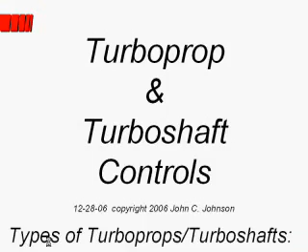This is a section on turboprop and turboshaft controls. There are basically two types of turboprop and turboshaft engines: they're either fixed shaft turbines or they are a free turbine.

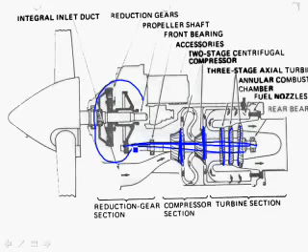First, we'll take a look at a fixed shaft turbine. This is a cutaway of a TPE 331, and we have a cutaway in the classroom. It's got a tire bolted onto it instead of a propeller, and it's got a main shaft running through the engine. It drives 2 stages of compressors, drives 3 stages of turbines, and this shaft goes into the propeller reduction gearbox, and there it goes slower. In this case, the engine spins at 40,000 RPM, and the propeller spins at 2,000 RPM, and of course, that's why we have the gear reduction.

And it's always connected. If you come up to this propeller and start spinning it, the engine will spin. And if you go over to our cutaway, you'll find when you spin the tire, the engine spins. That's why it's called a fixed shaft engine, because the turbine is always fixed or attached to the output shaft, whether it's a propeller or an output shaft for a transmission on a helicopter. It doesn't make any difference.

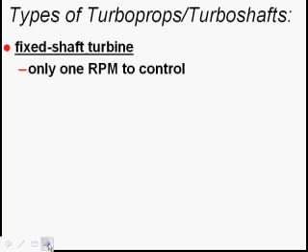One nice advantage of that kind of an engine is that you only have 1 RPM to control, so you only have 1 RPM gauge. You only have to make sure that one rotating component has a controlled RPM. If you looked at this turboprop, in fact, our stick diagrams that we've been drawing of turboprops are of the fixed shaft type. The shaft comes out, we've got a gear reduction box, and then there's a propeller, and if we spun the propeller, the engine would rotate.

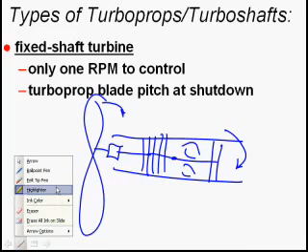And since the engine and the propeller spin together, if we put an accessory gearbox on this engine and then had a starter motor, not only is it going to have to spin the engine, but it's going to have to spin the propeller. So that propeller is going to be held in low pitch when the engine shuts down, so that when the starter has to spin the engine, the propeller doesn't have too much drag. So it's got blade latches in there that grab the blades when the propeller shuts down, just like in a Seminole, so that the blades are held in low pitch when the engine shuts down.

A free turbine, on the other hand, if you were going to draw a stick diagram of a free turbine, there's more than one way to do it. Let's see, here's one way to do it. Whoops, it's a pretty lousy propeller. You could run it like that. You could have a 2-spool engine that looked like this.

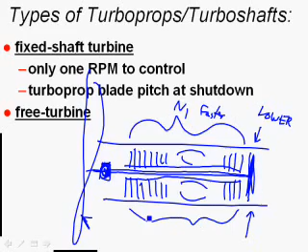And this one turbine drives the output shaft and the gearbox going to the propeller, it gets a spin at a lower RPM typically, although you're still going to have a propeller reduction gearbox. And the rest of the engine here, that's going to be N1. This RPM they're probably going to call the propeller, although you could call it N2. This is probably going to spin faster. And this turbine that is spinning the propeller is free from the rest of the engine, hence the term free turbine.

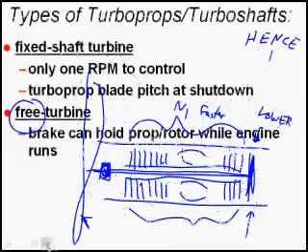And on this type of an engine, I'll get back to this in a second. Well, what the heck, we'll take a peek. Here's a Pratt & Whitney PT6, a very popular turboprop engine. Air comes through a duct on the bottom of the engine and enters the engine. Let's see, there's 1, 2, 3 - looks like 3 or 4 different stages of axial compression, and then, hard to see in this diagram, it has 1 stage of centrifugal compression.

It flings the air outward. It has a reverse annular combustion chamber, so we accelerate the gases aft. It makes another turn, and here's the turbine wheel right here, and this turbine wheel drives the compressor. So here is the gas producer, or NG, and then there's a second turbine.

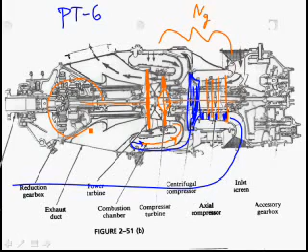The second turbine goes into the reduction gearbox, and that output shaft spins the propeller. So essentially, and then of course the exhaust gases come out and go backwards. So the PT6 is a free turbine in that the turbine that drives the propeller is free to spin separately from the rest of the engine, or you could say separately from the gas producer.

Now the nice thing about a free turbine is you can have a prop brake or a rotor brake, and you can run the gas producer part of the engine, and of course the accessory section is hooked up to it, so you can run the electrical generator off of the accessory section. Since the engine is spinning and it's got compressors, you can take bleed air off of it and run the air conditioner.

So if you've got a big turboprop and you don't have an APU, or a big helicopter and you don't have an APU, you can get bleed air for air conditioning on the ground, and you can spin the generator on the ground if you have some kind of a brake. That way you don't have to worry about a propeller or rotor blade spinning and chopping people up, yet you can have electricity and bleed air to run your pneumatics and air conditioning.

The other nice thing about a free turbine versus a fixed turbine is that you can get away with a smaller starter, because you don't have to spin the propeller when you start it up.

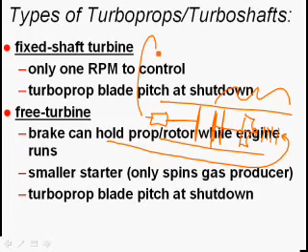Therefore, if you have a free turbine - we'll just say it's a PT6 because that's pretty common - here's our free turbine, and there's a couple more turbines, and the air is going to come underneath the engine and go in the intake. This propeller, since the gas producer is the only part that has to get spun by the starter motor, actually goes to really, really high pitch. In fact, it actually goes to feather.

The blades actually go to really, really high pitch because we don't have blade latches grabbing the blades at engine shutdown, so the blades go to feather. On a PT6 you can see the exhaust duct coming out of the side of the engine. If it's a free turbine turboprop, the blade pitch at shutdown is going to be feather because they're not going to waste their time and money on blade latches to hold the blades in place.

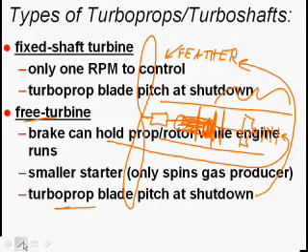The reason why it's better for helicopters to have a free turbine is the same reason why you can allow turboprop blades to go to feather. If we have this output shaft going to - I'll draw it like this - let's say we had a fixed turbine, and it goes to the main rotor transmission.

When we run the starter motor off of the accessory section, that starter is going to have to supply power to the main shaft, the main shaft to the reduction gearbox, the reduction gearbox into the transmission, and the transmission into the rotor blades. So the starter would actually have to turn the rotor blades, which has a ton of inertia, so we'd have to have a huge, giant starter, and it would take up too much weight.

So by having a free turbine, you would only have to spin up the gas producer. Then if you had a turbine inside of a shaft driving the output, the reduction gearbox and the output shaft wouldn't have to get spun by the starter. So for helicopters, you almost always see free turbines.

If you didn't have a free turbine, if you had a fixed shaft engine, you'd have to put some type of clutch mechanism so the engine could spool up and spin up. Like on a piston engine, you got to have a clutch in there so the engine can get started, and then you engage the clutch and the rotor starts to spin, but only after the engine gets started.

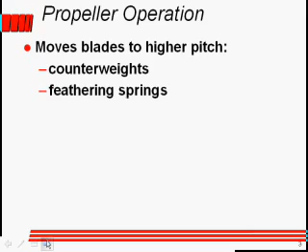Okay, first we're going to talk about turboprops, then we'll talk a little bit about helicopter control. Propellers on turboprops are very, very similar to those found on the Seminole, in that you can have low pitch, high pitch, and the blades go to feather, and the way it works is very similar.

I'll get back to those numbers here shortly. Let's just say you got to understand that in the middle of the blade, this is where it can rotate - it's going to have to rotate around the center of the blade because it's connected to the propeller hub.

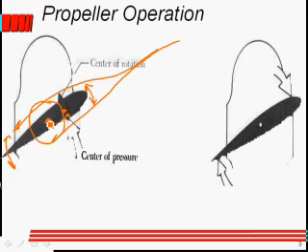Now, according to typical aerodynamics of asymmetrical airfoils, the center of pressure is in front of the actual center of where the blade's going to rotate. So as we develop lift, it's actually going to push the blades to higher pitch. That's called aerodynamic twisting force.

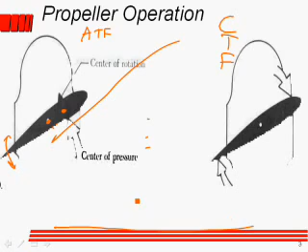The second one I want to look at is centrifugal twisting force. Let's say you're down here on the ground and somebody has a string with a rock on it, and they start spinning this string all around and around. What's going to end up happening is as it's spinning...

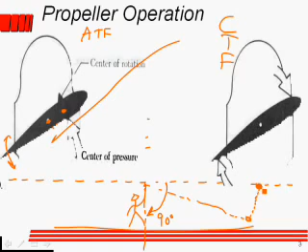This rock is going to come up against the force of gravity and it's going to try to get into the plane of rotation, which is 90 degrees to the ground. It won't make it all the way up because gravity still has to be overcome, but it's going to get really, really close.

Centrifugal twisting force essentially tries to bring all of the mass of the rotating blade into the plane of rotation. If this is the shaft and here's our rotor or crankshaft, here's our plane of rotation with a 90-degree angle, and we're going to try to bring it into that 90-degree angle. So centrifugal twisting force pulls the leading edge into the plane of rotation, and pulls the weight of the trailing edge into the plane of rotation, and that tries to make it go to a lower pitch.

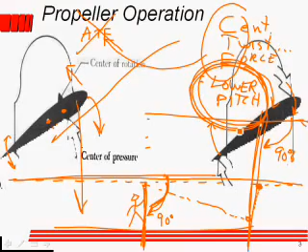Interestingly enough, centrifugal twisting force acting on the blade is always greater than aerodynamic twisting force. So if you had nothing on the blades, and the blades could change pitch at will as you spun it up and it started creating lift—which is blowing the air aft, which we call thrust—the blades are going to go to a lower and lower pitch, because centrifugal twisting force acting on the blades is much, much greater than aerodynamic twisting force.

Now, that centrifugal twisting force works out really well. But let's say we were in a single-engine or multi-engine airplane. We'll stay with multi-engine airplanes, because all turboprop blades act like multi-engine blades. In a multi-engine airplane, here is our airfoil, here's our propeller, and coming off it at a 90-degree angle is a big ol' honkin' counterweight.

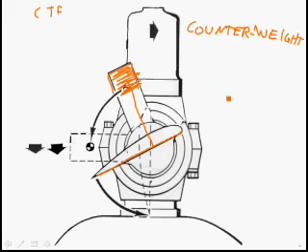Now, if we stop worrying about aerodynamic twisting force and just look at centrifugal twisting force on the blades versus centrifugal twisting force on the counterweights—the counterweights are a long way away from the point of rotation. So centrifugal twisting force acts on this weight, and since here's the plane of rotation, it tends to pull the counterweights into the plane of rotation and make the blades go to a higher pitch.

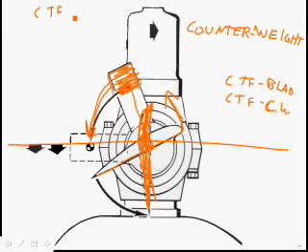So on twin-engine airplanes, this works out really good, because if everything else quits while the engine is rotating—like you run out of oil so the governor can't pump oil to the propeller—then the centrifugal twisting force acting on the counterweights will pull the blade over, bring it to a high pitch, and actually bring it all the way to feather, which is almost pointed perfectly straight into the wind. So centrifugal twisting force acting on the counterweights takes the blades towards higher pitch.

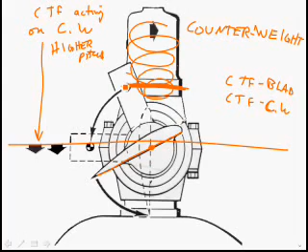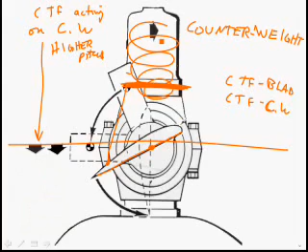Now, also, in these types of propellers are feathering springs. There's a couple of big giant springs in here, and they're pushing down on a piston. This piston is connected to the blades—well, it ought to be connected to the other side of the blade. As this piston gets pushed down, the blades go to a higher pitch. So the second force that's pushing the blades to a higher pitch is the feathering springs.

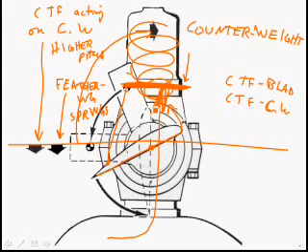And then if we want to take the blades towards low pitch, we're going to have to pump oil from the governor on this side of this piston. And of course, force equals area times pressure, and it's going to push the piston in the opposite direction.

That'll pull the tail of the blade up, and the nose will go down, and we'll go to lower pitch. So governor boosted oil pressure uses engine oil from the engine. It kicks the pressure up to 200 to 300 psi, and that will cause enough force to push that piston up against the feathering springs. It'll exceed the centrifugal twisting force on the counterweights, and this piston will go up, and the blades will go to lower pitch.

On all multi-engine and turboprop blades, you've got to understand that when somebody first made a turboprop blade, they were making it for a twin engine turboprop, so they wanted to be able to feather it. If you lost engine oil, the governor couldn't send oil to the propeller, so the counterweights and the feathering springs would take over and feather the propeller. On a single engine turboprop, they just use the same propeller as they already had, since they don't have to re-engineer it, and it costs less because they're already making those kinds of propellers. They don't have to redesign it and build it any differently.

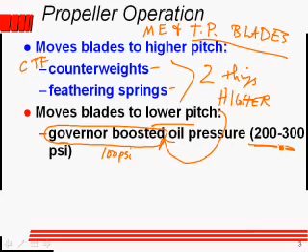The engine oil pressure is probably around 100 psi, but that doesn't have enough force to push on that actuator, on that piston. So the governor actually has its own oil pump and kicks the oil pressure up to 200 to 300 psi, so it'll have enough strength to actually push the blades where they need to go.

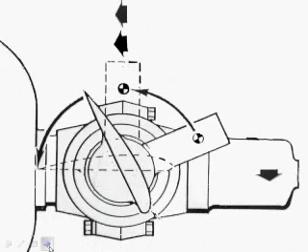So here's this picture from the side, from normal, and if we put a piston in here and we put our feathering springs in here, now we can look at it. Governor boosted oil pressure of 200 to 300 psi is going to push the piston in one direction towards low pitch, and that's going to pull the blade towards low pitch. The feathering spring and centrifugal twisting force...

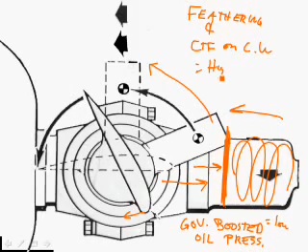...acting on the counterweights are going to make the blades go to higher pitch. And those are the three major forces that move the blades back and forth.

Okay, governor operation. The governor is there to do one thing, and that's to keep the engine—this is if you're flying a turboprop—to keep the engine and the propeller spinning at a certain RPM. If you've got a free turbine, you've got to govern the RPM of the free turbine, as well as take care of the RPM of the gas producer. So you're going to have something on the fuel control to maintain the gas producer RPM.

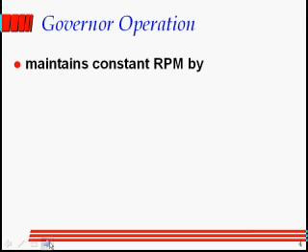But if you've got a free turbine, just like on a Seminole, or any other constant speed propeller driven airplane, you're going to have a governor, and it's there to keep the propeller pitch at whatever it needs so the engine will spin at a constant RPM. So how do you vary that prop pitch?

Well, the governor essentially is a mechanical computer. It takes two inputs, and it has three different outputs. The two inputs are: what's the prop lever setting that you're telling it—you're actually moving that prop lever, and when you push it forward, you're saying you want the RPMs to be higher; when you pull the prop lever back, you're telling the governor you want the propeller shaft RPMs to be slower. That's one input, the input from the prop control lever.

And then the other input is that it's geared into the engine. Just like a constant speed prop on a piston-powered airplane, the same on a turboprop—the governor is geared into the propeller shaft, geared into the gearbox, geared into that free turbine. And if it's a fixed turbine, it's geared into the entire engine. So if the RPM is lower than what you want, it's going to reduce pitch so the blade will speed up.

If the engine's going faster than you asked for, the governor will make the blade pitch higher so the propeller and engine will spin slower. It can pump governor boosted oil pressure out to the pitch actuator, which is a hydraulic actuator using that oil instead of hydraulic fluid. If you pump oil to the pitch actuator, the blades go to lower pitch. If you let oil drain out, the centrifugal twisting force on the counterweights and the feathering springs will take the blades towards higher pitch. If the engine is spinning the exact same speed you're asking for, the governor doesn't let any oil in or out.

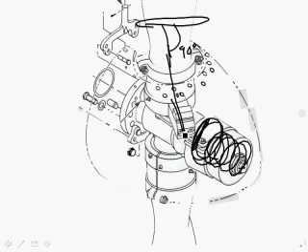Here's a picture of a propeller with a counterweight. There's a piston inside, and if this is a turboprop, there'd be counterweights in there. You can see the blade is oriented like this, and the counterweight sticks out at about a 90-degree angle to it. And here's the propeller flange, which gets bolted to the engine.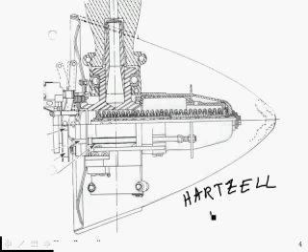Here's a cutaway view of a Hartzell propeller. You don't have to write down the word Hartzell, but Hartzell makes the vast majority of small turboprop propellers in the United States, and probably the world. If it's a Pratt & Whitney PT6 or a Honeywell TPE331, it's got a Hartzell on it. You can see there are feathering springs in here, a big one and one inside of it.

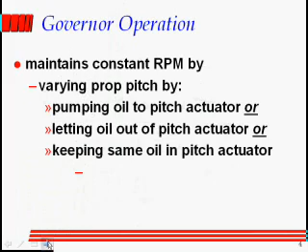This is the counterweight poking out mostly at you. I can't quite see where the piston is, there ought to be some O-rings in there, but I can't make it out in this diagram. This is a typical Hartzell turboprop propeller, and the piston actually moves in and out on the outside instead of the inside, like on some propeller pitch actuators. But we can never see it because we're pilots and we don't take the spinner off.

I already covered the fact that turboprop propellers use variable blade pitch to maintain a constant speed by use of the governor. How far can you go? Well, these are typical blade pitches for high and low.

If we look at this being the plane of rotation, and this angle here is about 17 degrees, that equals normal high pitch. Unless you're doing something unusual like feathering the propeller, that's as high a pitch as you're going to get. That's like putting it into fifth gear in a 5-speed car.

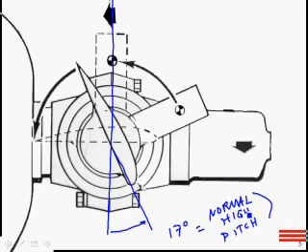The faster you go, the higher the gear you need, and the higher the pitch you need. This is typically the case the faster you go. This blade pitch can go down to low pitch, and if this angle is 3 degrees, that's typical normal low pitch, like being in first gear in your car. So when you're going slow, like on the runway and taxiing, you'll have a slight positive pitch of about 3 degrees. These are generic numbers, but they work pretty good.

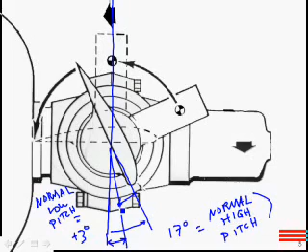So in a turboprop, 3 degrees is going to be low pitch under most circumstances, and 17 degrees is going to be high pitch under the vast majority of circumstances.

85 degrees is going to be feather. You notice this dotted line right here - that's the plane of rotation, and here's the propeller. This angle here is typically 85 degrees. And you're going, well, Mr. Johnson, 85 degrees, that's not 90 degrees, the blade's going to have a little drag. And you have a good point.

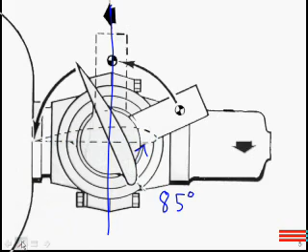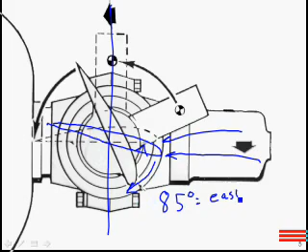There is going to be a little bit of drag. However, if you keep the blade pitch slightly less than 90, yes, when the relative wind hits it, there will be a little bit of drag. But if you need to unfeather it, the wind will be hitting it and trying to push it towards a lower pitch, so it makes it easier to unfeather. And the difference in drag between 85 and 90 degrees of pitch is not enough to worry about. So 85 degrees is full feather.

Minus 15, that's full reverse pitch. That's one great thing about turboprops. If it's a turboprop, then that means you are going to have reverse pitch. Cool reverse pitch. If this is the plane of rotation of the propeller, then right now we have 17 degrees.

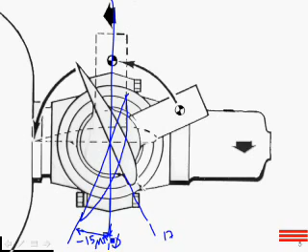If we put the propeller right here, it'd be 0 degrees. If we put the propeller at an even lower pitch, say right like this, we could measure this angle in here. And since this is 0, this is going to be minus 15 as the max, typically - the maximum negative pitch. So the propeller blade is still rotating in the same direction, it's just that it's going to be blowing air forward in the reverse direction. Hence the term reverse pitch.

And this is one of the really fun things about turboprops, is that you can make the blades go into reverse pitch during landing and slow the airplane down extremely well. In fact, reverse pitch on turboprops works way better than it does on a turbofan. And we'll talk some more about these degrees before this lesson is over.

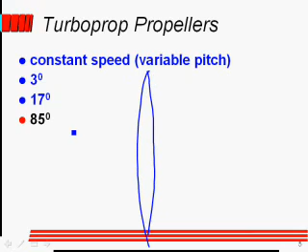Now, why would you not want to use this in flight? Well, let's say you got that Beech 1900 out there. I know this isn't really a great picture of a Beech 1900, but I never went to art school. So here's our engines, and here's our propellers. And of course you're flying through the air, so the slipstream is going like here. If you put these blades in reverse pitch, then the airflow that was going through and crossing the wings in a normal fashion, that was giving you lift...

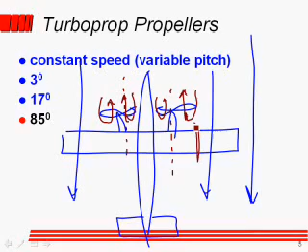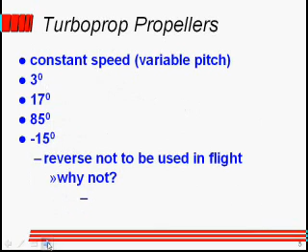Now if you try to make the blades go into reverse pitch, then the airflow across the wing right behind the blades is going to be disrupted, and you've lost your lift over a big chunk of the wings, and it's going to make it really, really easy to fall out of the sky. So all the turboprops I've ever seen have a restriction that says do not operate reverse pitch in flight. The reason is because you lose so much lift that you could stall very easily, and it would also affect the airflow across your horizontal stabilizer dramatically, and everybody likes to have full horizontal stabilizer and elevator control.

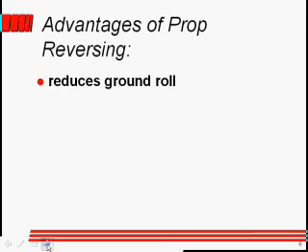Okay, what are the advantages of propeller reverse or reverse pitch? Of course, I already said it reduces ground roll. It reduces it dramatically. As soon as you get all three landing gear on the ground, you can go into reverse pitch, and you can go to a really high power setting. In fact, you can go pretty much up to takeoff power as long as you don't exceed the exhaust gas temperature or torque limits, just like you would have on takeoff.

And it also increases your ground maneuverability. There's two things here. First of all, if we look at the tires on a turboprop and we want to turn in a really tight turn, we could actually take this inboard propeller and have it have reverse pitch, and this propeller on the outside here have positive pitch, and that would help us turn and put the brakes a little bit here. So it can help us turn. In fact, you could make this turn without using any brakes.

So ground maneuverability is one - we can have tighter turns. And two, you got to understand that in a turboprop, if it's doing 50% on the ground at idle, and the blades, if we looked at the blades on the side here, and we had 3 degrees of positive pitch, we're going to be getting quite a bit of thrust off of the propeller on the ground, and we're going to end up having to taxi really fast or use a lot of brakes. So what we're literally going to do is go slightly into reverse pitch.

If here is the plane, here's our shaft, and here's the plane of rotation. If we just put that blade right at 0 degrees of pitch, then we're not getting any thrust. If we run it at 1 or 2 degrees of pitch, we're getting just a little.

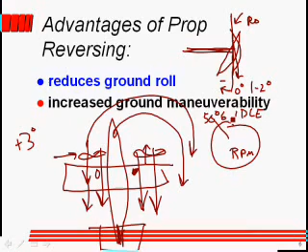If we want to slow down, we could make the blades go into reverse pitch or negative pitch, and we could slow down. So it dramatically helps maneuvering the airplane on the ground. And of course, my personal favorite is it makes that really cool noise. Like when the airplane touches down, they go into reverse pitch and it goes whoa, like that. I really like that noise.

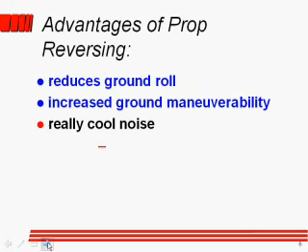What are the disadvantages of using reverse pitch on your propeller blades? Well, since the airflow is interfered with going into the intake—normally the airflow goes through the propeller blade and then into the intake, but instead of helping blow air through the intake, it's actually trying to pull it out—it does make it a little harder for cooling air to go through the engine, so engine temperatures are a little bit higher than normal. So you need to keep an eye on the EGT, the exhaust gas temperature, while you're doing reverse pitch.

And since the propellers are typically lower to the ground than the intake is, it's not that you're going to throw up rocks when you go into reverse pitch and have them get sucked into the intake and cause foreign object damage to the engine. Much more likely is that you'll throw rocks up, then taxi and drive through them and hit the propellers. So it does increase the likelihood of propeller damage.

Okay, in turboprops, there are essentially two ways to operate: alpha mode and beta mode. Alpha mode is probably 95% of the time, and that's the mode you're using in flight. Generally speaking, although a lot of turbine engines idle at about 50% of their rated RPM, turboprops typically have a flight idle. That is, on some turboprops, just before takeoff, you push a separate lever from ground idle to flight idle.

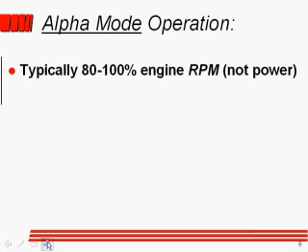Now remember, at 80% engine RPM, you're certainly not producing 80% engine power because there's not a direct and perfect relationship between RPM and power. So as you pull the power lever back and the engine slows down to 80%, you're probably only going to be doing 50 or 60% power.

There's essentially two levers if you take a single engine turboprop, like for instance a Cessna 208 Caravan. There's going to be one lever sticking up, and that's the throttle, or in jet engines we call it the power lever. Another lever sticking up, and that's going to be the prop lever. You're going to operate it very similar to how you do right now in a piston-powered airplane with a constant speed prop.

This lever on the left is fuel, controls the fuel—you're telling the fuel control you want more thrust. And the propeller lever is you're telling the governor that you want to change RPMs.

So that's pretty typical. The vast majority of the time you're in alpha mode, and alpha mode is a little bit of taxi and certainly all the takeoff, roll, climb, cruise, descent, and touchdown. So that's why alpha mode is used the vast majority of the time. You pretty much set the RPMs for redline for takeoff, push the power lever up so you get redline torque.

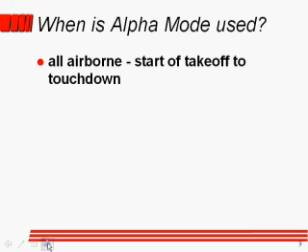So if we were looking at prop RPM and we looked at the throttle quadrant from the side, the prop lever—you'd push it all the way up so that the prop could hit redline for takeoff. And then you're going to set power using the torque meter.

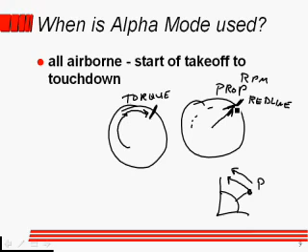This is prop RPM. Using the torque meter, here's redline. Once you set the prop all the way forward so the engine can go to redline, you push the power lever up, and long before you get to redline torque, the propeller will have come up to redline, and then it'll just sit there because that's where the governor keeps it. As you keep advancing torque, the governor, to keep the engine and propeller from overspeeding, will increase blade pitch. That's how you typically do it on a piston engine with a constant speed propeller.

Now you can taxi around. Of course, during taxi, the alpha mode is plus 3 to plus 17 degrees of pitch on the blades, so even on the ground, you're going to be generating some thrust.

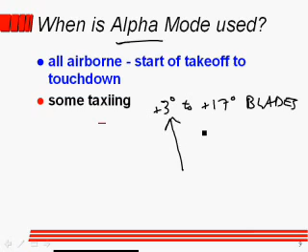Even if you go to ground idle, like in that Cessna 208, you've got the power lever and the prop lever, and there's another lever sticking out on the side that you'd pull back to ground idle after you got down on the ground. If this is prop RPM and here's redline at 100, normally you'd be between 80 and 100, but if you pulled it back to ground idle, it's going to come down significantly lower.

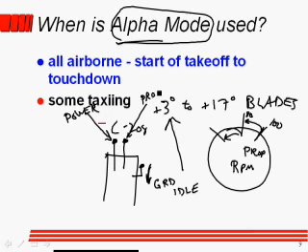And you're still in alpha mode. That is, when you're in alpha mode, the power lever on the left tells the fuel control how much fuel you want for more power, and the prop control tells the governor how fast you want the RPMs.

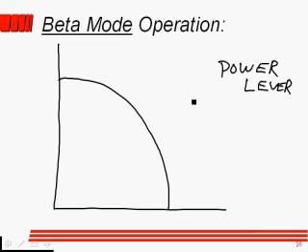Beta mode is the other operation. Let's have a big one here. Let's say here is the throttle quadrant, and we're going to look at the power lever, not the prop lever, but the power lever. And we'll say that right here is flight idle, and that's how far you can pull the lever back in flight.

In alpha mode, you're going to be using the power lever in flight, somewhere as low as flight idle. During takeoff roll, you'll push it up to redline torque, and the RPMs will be somewhere between 80 and 100%.

When you touch down on the ground, there's either going to be some button or some lever, or you may actually have to pull the lever up before you can pull it back, and you're going to pull it back into beta mode. Now, the lowest the propeller can get in alpha mode is plus 3 degrees of pitch.

During alpha mode, the governor is controlling propeller blade pitch to give you the RPM that you asked for. When you go into beta mode, it's completely different. The position of this power lever, forward or aft, inside of beta mode, has direct control of the propeller blade pitch. You're literally bypassing the governor. The propeller governor is doing nothing during beta mode.

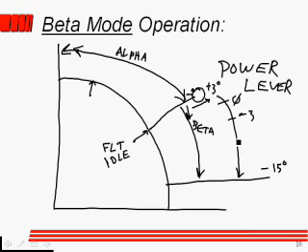Beta mode goes from plus 3 all the way down to minus 15 degrees. So if this is plus 3, this might be 0, here's minus 3, and maybe here's minus 10. You can run your power lever anywhere in here you want to. And you'll notice that beta goes all the way up to plus 3, so you can actually taxi around in beta with 1 or 2 degrees positive pitch if you want to.

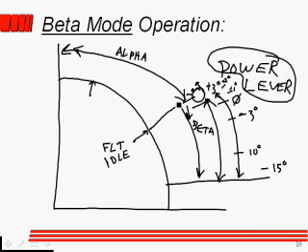Or you can say, you know what, I don't want that, I want to go into alpha mode. You can push the power lever — this is the power lever, not the propeller lever — and the power lever decides whether or not you go into alpha mode. As soon as you pull that power lever aft and you're in beta mode, the position of this power lever gives you direct control over blade pitch.

On the fuel control unit, there's another governor that maintains RPM for you. It's not as good a governor as the propeller governor, but it maintains engine RPM, so now you're controlling blade pitch, and if you increase pitch and the engine starts to slow down, it'll put in more fuel. So if you land the plane, just as you're touching down you're right at flight idle, and all the wheels hit, then you lift up the lever and continue pulling it aft into beta mode — you can keep pulling it as far as you want to.

Obviously, you're going to want to make sure you don't hit your EGT red line, and you want to make sure that you don't hit your torque red line either. But you can pull the power lever aft into beta mode and get more and more reverse pitch. And if you're watching the prop RPMs, let's just say there's a red line, this prop RPM is going to vary a little tiny bit, but it's not going to vary very much.

As we pull the power lever aft farther into beta, closer towards -15, the load on the engine is going to get greater, and to blow that air back and still maintain RPM, the fuel flow is going to increase. So if we had a fuel flow gauge, let's just say right here is typically idle, so here we are at flight idle. If we pull the power lever back, RPMs won't change very much. Fuel flow, however, will go up, EGT will go up, and torque will go up.

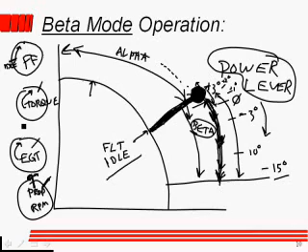So you pull the power lever past it, and now the power lever is an oil connection. It essentially is, the farther you push the power lever forward, the less oil goes in, and the farther you pull it back, the more oil goes in. When you pull it back and you want low pitch, that's more governor boosted oil pressure. So there's more oil that goes to the propeller when you pull it back, and that makes the blades go to lower and lower pitch.

Effectively, negative pitch is just a really, really low pitch, because you're actually going from +3 to +2 to +1 to 0, -1, -2, -3, and all the way to -15. Just like feather is really just a very, very high pitch, negative pitch is really just a really, really low pitch.

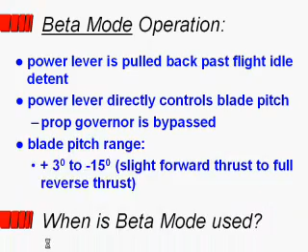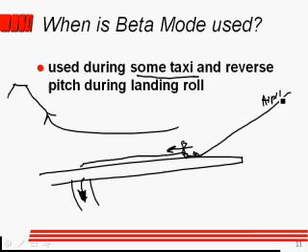You're going to use beta mode when you're taxiing. And of course, when you touch down, if here's the runway, you're going to come in and touch down. As soon as you get all 3 wheels on the ground, now you can go into reverse pitch and blow air forward, and of course, you're going to slow down. Then when you turn off the runway onto the taxiway, you can either stay in beta mode if you want to, or go to alpha mode. You never use beta mode during the takeoff roll, and you never use beta mode in climb, cruise, or descent. You're still in alpha mode until you touch down and go into reverse pitch.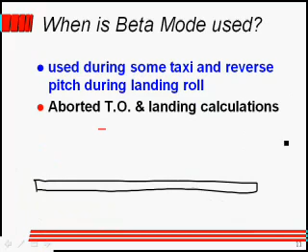Now, just like turbojets and turbofans have thrust reverse, if you come into land and you're making calculations before you take off for your landing airport, you're going to base it on yes, you're going to use anti-skid, but no, for calculations purposes, you're going to use no reverse pitch. Now this is for calculations. In reality, are you going to use reverse pitch? Yes, and all those great reasons are there, like they are for brakes. It reduces your landing roll, and it reduces your brake maintenance so you can keep the airplane in service without having to replace brake pads or anything. And it works better than reverse thrust does, so you're going to be able to stop much shorter in a turboprop than you could in a turbofan with thrust reversers.

But if for landing calculations, you plan on using anti-skid, you plan on not using the reverse pitch, and if you have to abort the takeoff, if here's a runway that you're going to take off on, and you're going to calculate your acceleration distance, then hit V1, your decision speed, just before you would rotate, and then decelerate, this deceleration distance is also based on using anti-skid, but based on not using the reverse pitch for your calculations.

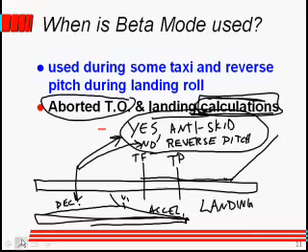If you're going to fly a turboshaft engine other than just an APU, you're going to be flying a helicopter. I've not seen a helicopter that had a fixed turbine. I guess you could, you just have to put a clutch in it. If here's the rotor blades coming down to the main rotor transmission, you'd have to put a clutch. Then you'd have your output shaft and your gear reduction box and your engine.

So if you have a free turbine, you don't have to worry about the starter having to run all of this during engine start, and you don't have to have a clutch. You can just let it hook together because the starter is only going to have to run the gas producer.

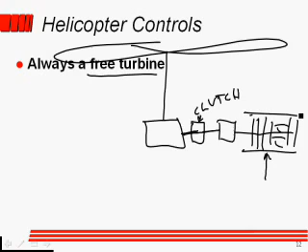With helicopters, it's extremely important to maintain a constant RPM on the rotor. You'll see on helicopters there's one gauge, or maybe several, showing rotor RPM and the output shaft, or N2 typically what it is. They'll probably call it rotor and turbine RPM, and there's two needles on it. If the needles are split, that's not good. What's supposed to happen is the needles are supposed to be right on each other. This will typically be in percent RPM.

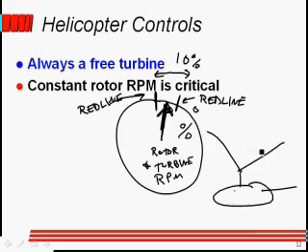There's going to be a very small range of RPMs here, maybe only about a 10% spread, where above it is too fast and the parts will be overstressed. And if you go below it, the blades will start coning, and they'll get overstressed and bend, and neither of those are going to be fun things. So with helicopters, you've got to maintain a reasonably constant RPM.

Interestingly enough, on a helicopter there's a governor in the fuel control that maintains engine RPM while you lift up on the collective or push the collective down to change rotor pitch.

Here is a picture of a simulator, and of course you're going to have a stick for the pilot to fly around. The right hand comes in, and this is the cyclic - that pushes the helicopter forward or aft, up and down, left and right. But then the collective down here increases the pitch on all the blades collectively, hence the term collective.

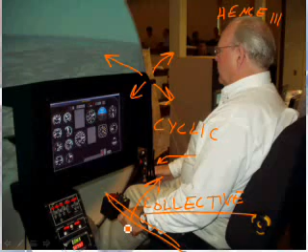And when you lift this up, all the blades go to higher pitch and the helicopter will climb. The problem is that our rotors, or the RPMs, tend to go down, so you need some system to accurately keep that RPM the same.

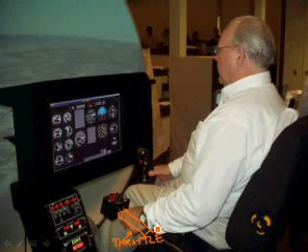In a turbine-powered helicopter, this also has the throttle on it, or it controls power. You set it where you want it, and then the governor on the fuel control keeps the RPMs the same. This is kind of like beta mode in a turboprop.

Here's another picture of a different collective, and there's some controls on here. We're going to look at this switch right there. It says increase and decrease governor RPM. So once you set the power about where you want it, if you want to increase or decrease RPMs, you just kick it up or kick it down. This is essentially the same as pushing the power lever forward or aft while you're in beta mode to increase or decrease the power.

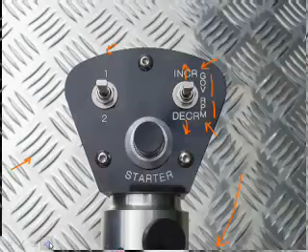Rotor droop is a term used for low RPMs. Now, the rotor doesn't actually droop - interestingly enough, the blades tend to cone up during rotor droop - but this drooping is talking about the RPM, and if the RPMs get too low, that's one of the ways you're going to be really, really unhappy.

If you're flying a turboshaft or a turboprop, it's very common to have what's called a negative torque sensor. Here, we'll try this on a fixed shaft engine, like the TPE 331. Oh boy, that thing has lots of turbines.

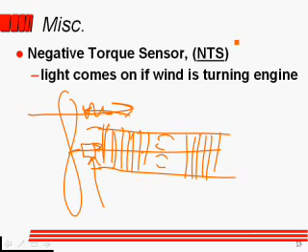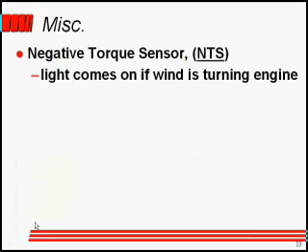Normally, the power goes from the engine to the propeller. But if the flame stops burning, say you have a flame out, you're not going to have power going to the propeller. It's possible that the airflow going through the propeller spins the propeller around, and the horsepower goes back and spins the engine. Inside of the gearbox somewhere is this negative torque sensor. And if the power is from the propeller spinning the engine instead of the engine spinning the propeller, you might get a light telling you, hey, your engine's not working right. It's not producing very much power.

You can use this negative torque sensor, in addition to having a light come on, to engage what's called auto feather. Of course, if you've flown a multi-engine airplane and one of the engines quits, then you're going to have asymmetrical drag.

If this engine quits working, it's going to pull you around to the left, so you have to stick in a bunch of rudder. You have to decide if this propeller is still rotating, windmilling, at a low pitch, it's going to cause a lot of drag, which tends to make the yaw even worse - you'll yaw even farther to the left. So you have to feather the blades, point them into the wind, so there's not too much drag.

If you have a negative torque sensor set up in the cockpit, you can turn the switch on to arm. And if it's armed and one of the engines quits producing power, it'll automatically feather the bad engine - hence the term auto feather.

If you're flying a turboprop with more than one engine, it's very common to have an auto feather system, and I highly encourage you to use it. At low altitude, after you get past 1, 2, or 3,000 feet, you can turn it off, but in that first few thousand feet, if the engine quits, you're going to have to decide which engine is the lousy one and feather it, and you won't have much time to do it. The nice thing is the auto feather system does it essentially immediately and feathers the bad engine, so you get less drag.

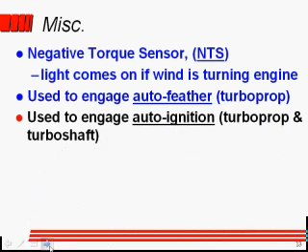Also, if you're flying a turboprop or turboshaft, you could have an auto ignition system. It's essentially set up so that you hit the arm switch, and again, if the flame goes out in your engine and the negative torque sensor comes on, it'll turn on the ignition switch, and hopefully the fuel will catch fire, and hopefully it'll only be a second or two where the flame wasn't producing power.

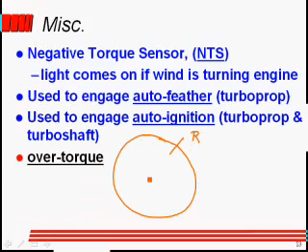Over torque is really easy - it means you went above the red line torque. If you see the needle coming up before it gets past red line, you need to do something about it. But this is an industry common phrase for turboprops and turboshafts: if an over torque occurred, it means you went past the red line and you're going to have to write it up, and somebody's going to have to check the engine out and see if any damage occurred.

Over temp, also very important, is EGT. Here's the red line - you're pushing the power lever up and you're not watching the EGT. You certainly don't want to go past the red line. If you do, it's an over temp.

The most likely times for that to occur is at high altitude, high outside temperatures, and if you're in a helicopter having to go into a hover, also high gross weight, turboprop and turboshaft. Because if you're in an airplane, whether at low or high weights, and you push the power lever at a high altitude, high temperature, you might actually hit your EGT red line before you hit your red line torque - that's more likely to occur on a hot and high altitude day.

If you're in a helicopter, as you're trying to pull into a hover, you're also going to be looking at that torque meter, and as you're coming up on torque, you're also going to want to keep an eye on EGT. Some people might not pay enough attention - you might not have gotten up to torque, but at high altitude, high temperature, and reasonably high gross weight, you might hit EGT first.